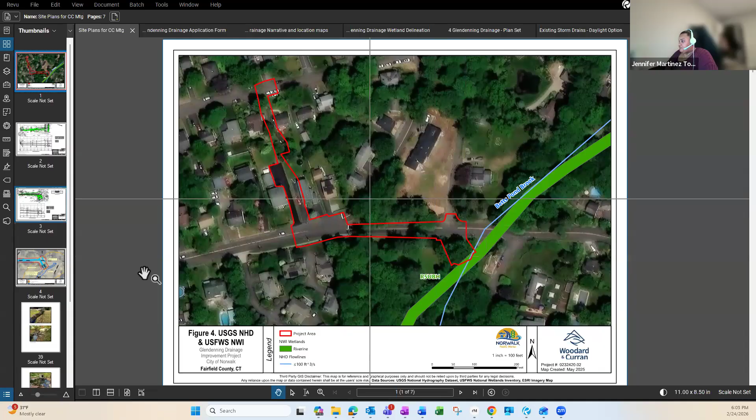So moving on to the next figure. Generally, there's an existing 36-inch reinforced concrete pipe that goes from Glendenning to Cannon Street that we will be replacing with a 48-inch reinforced concrete pipe. At the connection in Cannon Street downstream, that changes to a 6x6 reinforced concrete box culvert. The existing infrastructure in Cannon Street to the outfall is a 36-inch RCP. What's an RCP? Reinforced concrete pipe. So that continues down Cannon Street before it turns to outfall into the Betts Pond Brook. Now I'll hand over the mic to Reid so he can walk us through the outfall improvements and the impacts to the upland area.

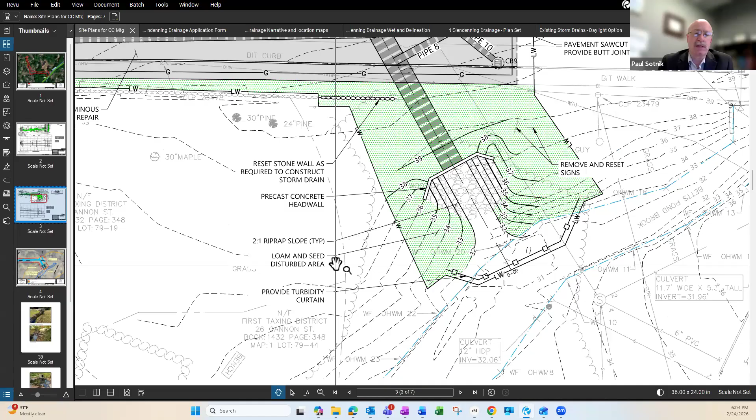And I can give you guys a rough idea of where we are. It's at the intersection of Lane Road and Sawmill, just below the intersection. So this is Lane and this is Sawmill here. This project is being done at the request of property owners. We've had chronic flooding up there for years, and 18 Glendenning and 16 actually get water in their houses. Reid, can you take us through the outfall and the impacts?

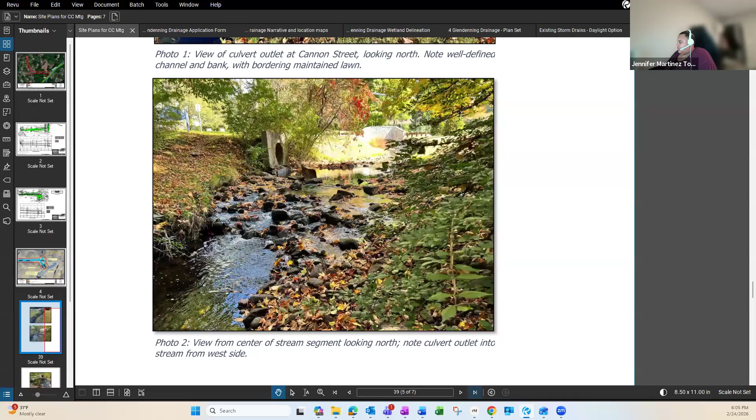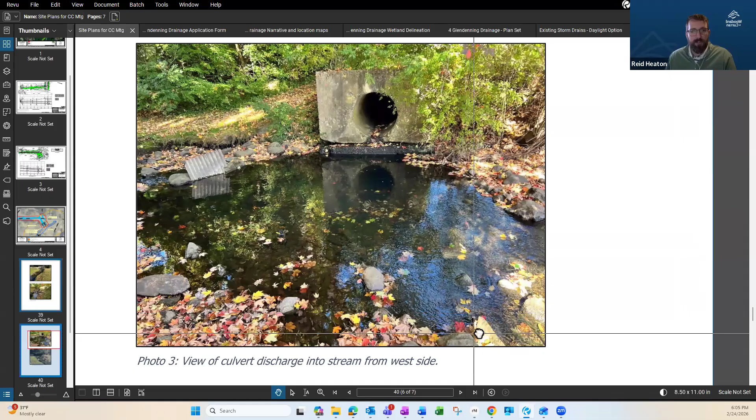Sure. Maybe it makes sense just to look real quick at a picture of the existing outfall. This one is better. So the existing outfall exits to Betts Pond Brook. It is proposed to be removed, which is the work in waters that's going to be required for this project, and then a 6x6 box culvert with prefab wing walls will be installed set back from the ordinary high water mark. So if you want to pull up the proposed plans, Jen.

Yeah, site plan, this one? Yeah, maybe just go straight to the plans. So the work in waters is there at the existing outfall. You see where the turbidity curtain is placed at the brook. And then there's the proposed outfall with some riprap for scour protection.

So this is set back from the ordinary high water mark, one, to prevent placing any riprap or scour protection in the stream, and two, to allow for the additional flow from the larger pipe. So this area would be restored with riprap at the mouth of the culvert, seeding around the area, and then at the end of that riprap, some native material that would be comparable to what's in the stream bed, because we don't anticipate vegetation growing there in the water path. And that is the overall work in waters.

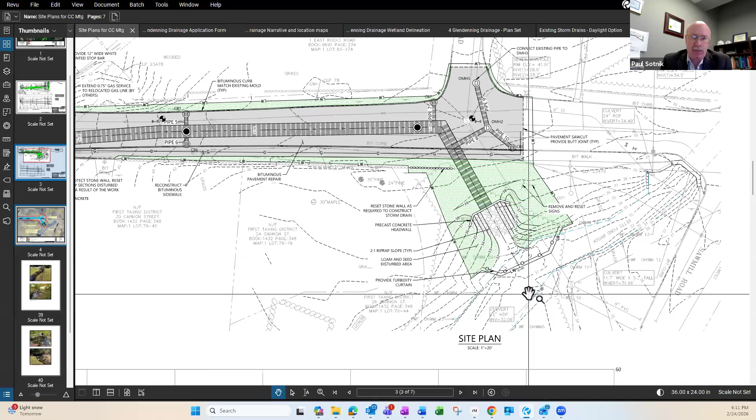So we have a model that we've been coordinating with the city on for a few years now, where we use it to analyze any new drainage improvements in the city and how that would impact the system overall. And Woodard and Curran has a dynamic model that they run that shows in different colors when the flooding starts in existing conditions, and then what it'll look like after, so that it determines it's not going to end up causing additional problems. And one of the key words Jen mentioned, this will mitigate but not totally eliminate flooding. It's to try and mitigate it as much as we can.

Got it. And now, is that something, Alexis, that we should have on file as part of this application? You're muted. Sorry. It's certainly something that you can request to be added to the file. Absolutely. A drainage report would provide you at least some idea of the size of the watershed that this drainage system captures, and then its relative placement within the larger watershed.

Yep. Yeah, if you guys don't mind, it's not that we don't trust you. It's just that it would help us have a complete application. Okay, so a drainage report that basically shows the pre and the post, essentially. Yeah, okay. The pre and the post summary. Oh, sorry. Yeah, I was gonna say pre and post, and so not just obviously Public Works focuses

on alleviating the flooding conditions in the locations that are contributing water to the pipe, and I'd say the wetland agency is obviously interested in helping that situation, but at the same time would like more information about the analyses that were run for quantifying the additional input that's going into Betts Pond Brook. And we'll make sure that we can get that from Woodard and Curran and provide it to you.

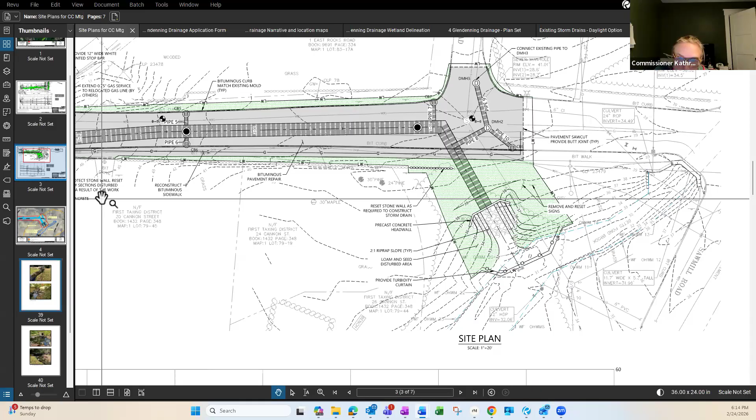Hi, I just had a question because I see it says wooded, but it doesn't have any trees specified in there. But I see that there's some pine trees and a maple tree. Are there trees in there that aren't demarcated that need to come down to facilitate this? I was gonna ask the same question. Good call.

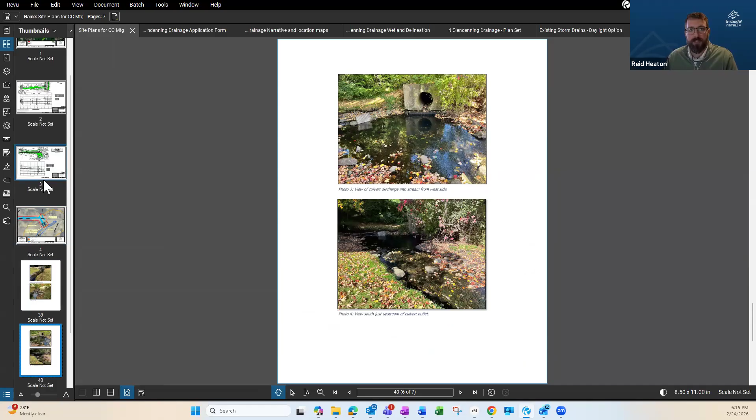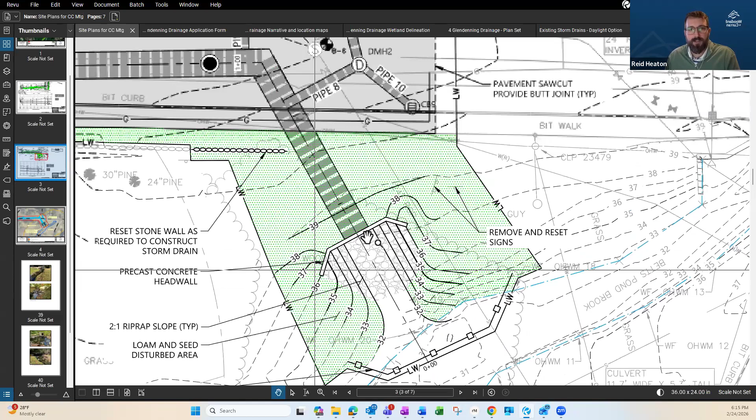Yes, there's some shrubs at the top of the existing culvert, and then to the west, there's some wooded area. You can sort of see it in those pictures that Jen has. But from talking with the team, there's what they see as two mature trees that might need to be taken down to perform the excavation of the existing pipe. And those are kind of west of the existing pipe alignment. And the team has been looking at avoiding them. But if you move the alignment to the east, there's an existing sewer line. So there's no moving that way.

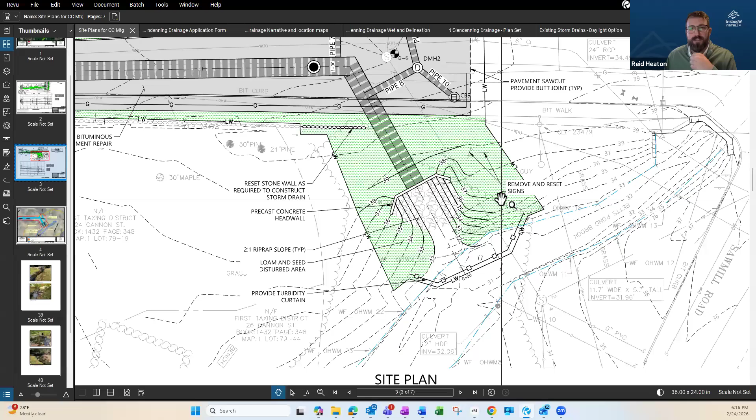And then to the west, I believe there's some overhead utilities that they were trying to avoid. And there's more woods to the west. Yeah, go ahead. As you go further to the west, it gets more and more wooded with more trees. So I guess my question would be, the drawings don't show the trees that are coming down right now? Yeah, we were looking at a sketch from someone in the field of the two mature trees, but we don't have them symbolized here.

Okay, so I guess that I would request that first. It's always good to know, like Catherine was alluding to, what's going to be destroyed as we do this work. And then in a follow-up to that, I would ask, how can we maybe redo or replant in a way that can replace what we took down?

Commissioner Clocky, that's a perfect lead in. I'm working with Sarah Cruz in the engineering division. With the new Chapter 112 from a couple years ago for trees, anybody that does work is required to get a permit. So we are actually issuing permits for city projects too. So we'll be issuing a tree removal.

If it meets the criteria and it's on First Taxing District property, they'd be posted and go through the proper posting process. And then a permit would be issued. But in order to secure the permit, the contractor that actually puts the chainsaw on the trees has to be a licensed arborist, have the proper insurance and bond in order to get the permit.

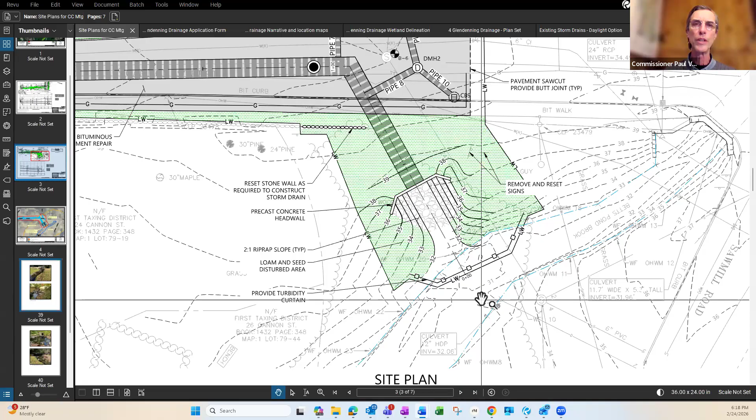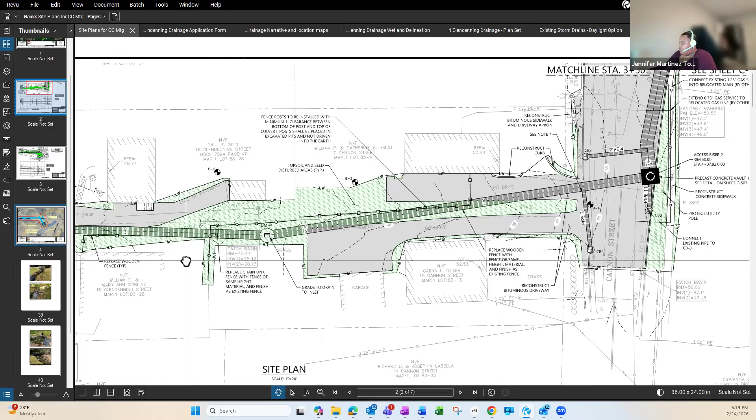Oh, I'm sorry, Mr. Vinette. Yes, being that it's stormwater coming off the streets and being put into the brook, is there any filtration system in there before the water exits? The riprap is intended to dissipate energy, and there's going to be some filtration with that, but we don't currently have an established filtration system upstream of the outfall. No. Mhm. Yeah, I guess that's a good question.

What can we expect? Well, go ahead. Oh, you want to? Well, one of the issues with this is that we have a full size 6x6 box culvert. So to be able to get an online system, it would be a little more difficult because you'd have to basically take the system offline, run it through, and then back in. But then you get capacity issues with those systems also.

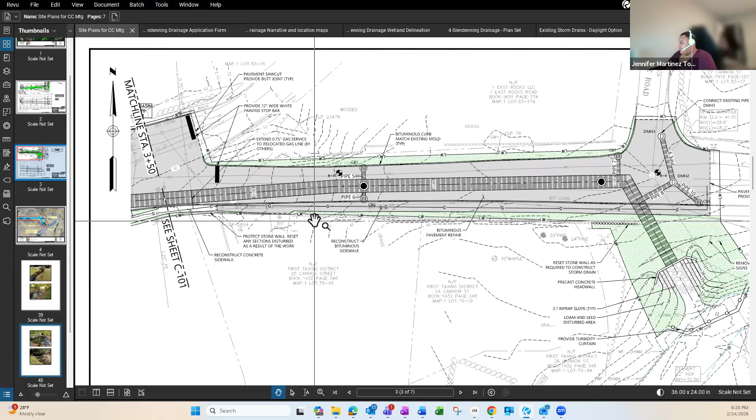And I'd also like to point out, as you see, in terms of collecting the street water, there are catch basins attached to the system, as you can see right there in the picture. And all those catch basins will have sump pits in them. The purpose of sump pits is to collect any debris that could settle through there. That's a part of our regular system and a common practice within any type of drainage construction.

And Jim, can you just explain who you are real quick? Oh, I'm sorry. I'm Jim Meehan. I'm the principal engineer for the Department of Public Works. Should have started off with that. I apologize. No problem.

Thank you. So Paul, and Alexis, maybe I should start there. I want to respect the question and the intent of the question within the framework of what we can expect as an agency and what is typically done in this situation. Yeah, so typically you have not seen water quality improvements proposed where there's an existing stormwater system that's being upgraded. Not always, but it certainly does add a significant cost. And I would think that is probably the main driver.

As Mr. Meehan mentioned, the water gets into the system via catch basins. Those will have deep sumps, which will collect sediment. I don't know if they have all the bells and whistles for trapping of floating debris, but otherwise you get into an initial cost and then a maintenance cost. Again, I'm not Public Works, but Jim might be able to better speak to the limited amount of budget that is available for maintaining the system just for its water quantity needs.

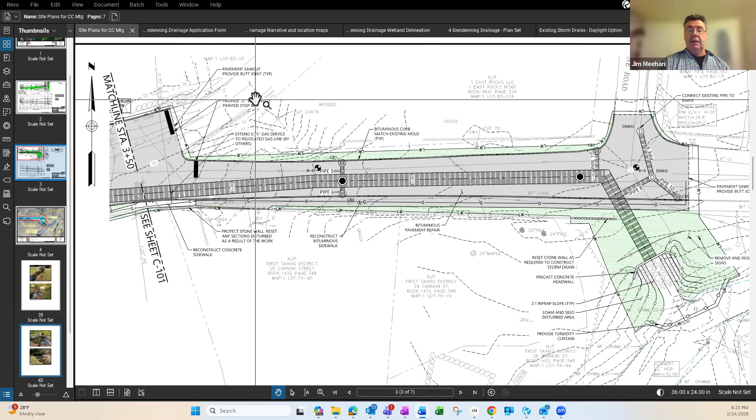The box culvert that we're proposing over here is basically updating an existing system. So it's not really introducing any new debris into there other than the catch basins themselves, which to our particular point, when the rainwater goes into the catch basins, the sediment will be heavy enough, will sink into the sump pits. And then periodically our maintenance crews go out there and they will just maintain them. And they'll vacuum it out. They'll do everything and clean it out periodically.

If we have determined that the particular situation, most of them tend to be kind of standard. If for any particular reason there's concern that, hey, listen, this particular area could have more debris, let's say we have done those in the past, we would tend to treat that, as long as it's feasible, to increase the size of the sediment basins, the sumps that are in the basins themselves. With that, I'm not sure if this particular region calls for that, but that's certainly something we could look into, provided that there's depth to put in more depth of the sump itself. And if we could do that, make sure that it collects any additional debris.

Okay, I think there's actually a little more depth to Paul's question, but thank you for that response. We'll keep going and maybe we'll circle back or maybe these guys will address it. But let's see. Elise, you had your hand up, then you dropped it, and I think go ahead. I think that's right. Miss Heath raised her hand first. Oh, okay. Did Catherine get you? Okay, go ahead, Catherine.

I guess I just have a question on the runoff, because is most of the runoff that's getting pulled in here coming from the road or is it from other things? Because normally, I just wonder if there's a different burden that residential and commercial runoff systems have to have over and above the city. Just trying to understand that. And then there obviously are issues of water quality going into the brook with a lot more road runoff that is a little bit concerning.

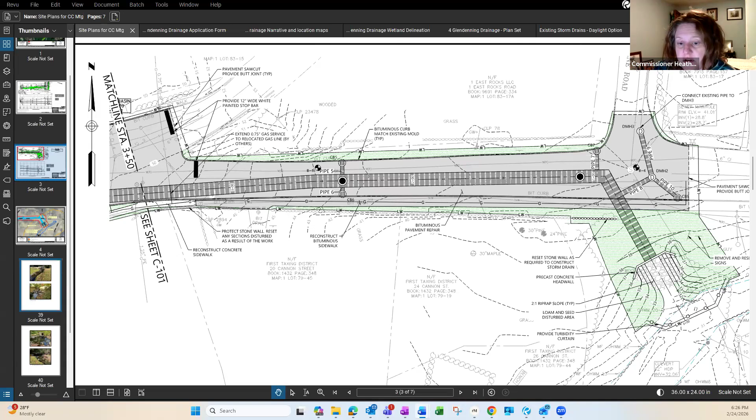Where the pipe exits right now. Steve, you spoke to this before, but about the impact downstream from there, I believe it's a pretty low-lying area down there with more water being pumped through, and where it comes out right now the banks are really, really eroded, and the tree roots are bare and everything around it. I live across the street, so I'm familiar with it. I just would like to see something set up, if possible, to restore it a bit with plantings. I think it'll go a long way towards hopefully mitigating flooding. Right now, it pretty much dips down like this and everything's eroded out.

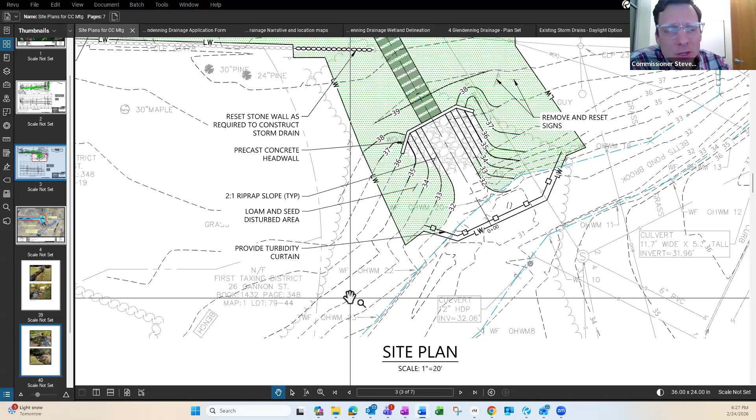Well, I'm confused though. So we're not changing the profile of Betts Pond Brook. But is that what you're suggesting? Jennifer, could you flip down a couple pages to the pictures? Because I don't live across the street, so I'm not familiar. Yeah, the work on the banks will be limited to just that area at the existing outfall. The park is to your left here, is that right? Well, wait, no. Cannon Street is to the left, north.

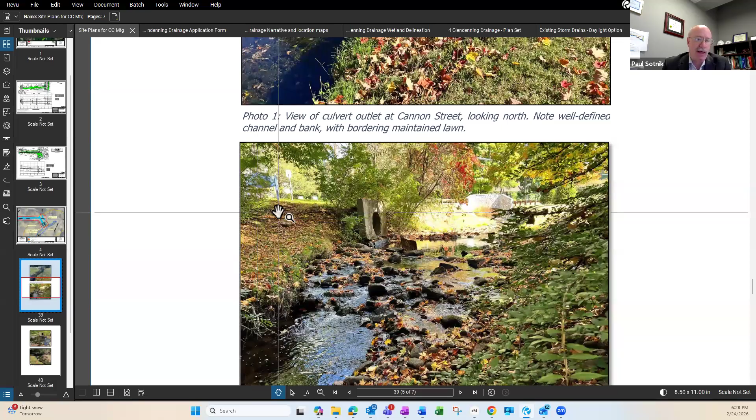Do you live along Sawmill? Sorry? Do you live along Sawmill? No, I live across Dry Hill, so you're coming right across Sawmill from where the entrance of the pipe is. So right, Cannon is to the north and the park is to the north. In that area there, that's all the First District Park. Exactly. That's to the left, right, Paul? To the left, that's correct. Okay, so Heather, what do you, yeah.

No, my point is, is there going to be increased output from the water here from the new, I mean, I would assume considering... Yeah. I mean, the whole point is to increase the size of the pipe so you get more water through it. Right. And my concern is that when the water gets here, it's a fairly flat or eroded out banks over here. I see, yes.

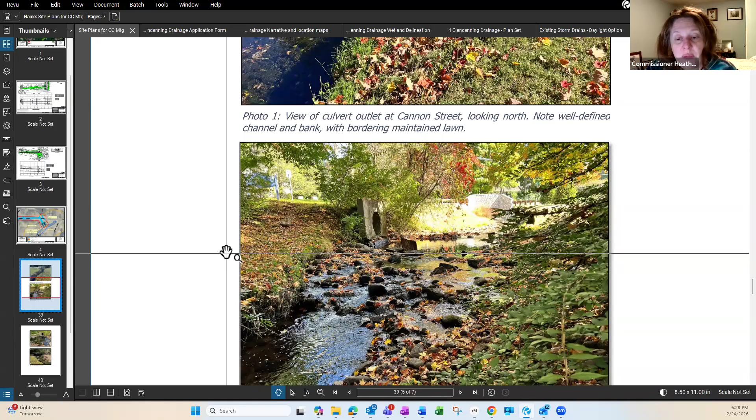So Jennifer alluded to it where they're pushing the head wall back. What do you call that part? The head wall and wing walls. Pushing it back into the slope and providing riprap, kind of a runway, I'm probably putting words in these engineers' mouths, so forgive me, but providing a runway to slow down the water before it enters into the brook. Right. Okay. And I would assume that's where the trees are coming down as well, potentially. And if so, is there a planting plan?

I just wanted to echo what Elise was saying, if there's anything that we can do as far as replanting or planting better, improving. Yeah, Paul had said that they will be doing a tree replacement plan, but we said it'd be nice to be in this application, so he's going to do that. Okay. Paul, what I'm hearing is maybe a step above your replacement plan. It's a request to look at a way to enhance the area even more to make it more resilient than it is now. Yes, that was my question. Sorry if I missed that. I've been trying to turn this map around on my screen to figure out where I am for like 10 minutes. It's okay.

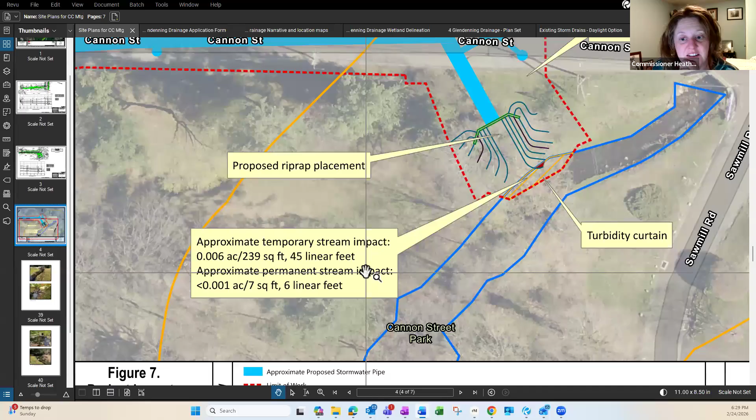Matter of fact, one of the trees, see where the turbidity curtain label is right there? Yeah. As part of the box culvert, when we were doing the repair of the bridge, you'd asked us to put the tree in right above where it says curtain. That's the tree that went in as part of that project. Okay. Yeah, we can definitely put together something. We can work with Alexis, between Sarah Cruz and Alexis and I, to come up with a planting plan that we would recommend and then provide it to you.

Great, thanks. I heard two questions, and I think you've already said that you'll get that to the commission before their next meeting. One has to do with the construction phase and replacement of vegetation lost and mitigation of the grading associated with the new head wall. And the other, I presume, will be taken care of with the drainage report. I just wanted to confirm there's an existing stormwater drainage system here now.

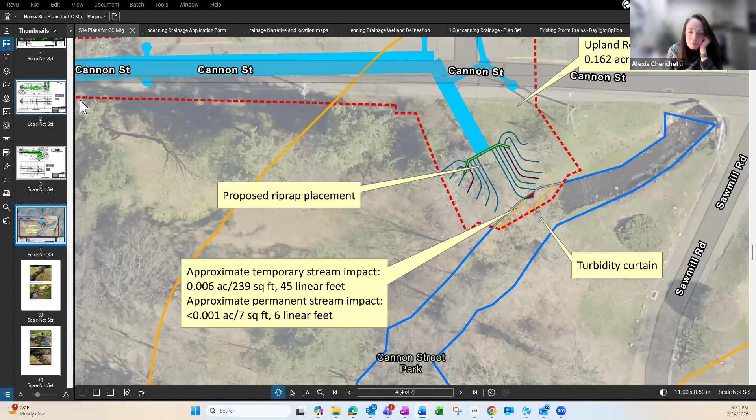Are you proposing any additional expansion of its area of contribution, additional catch basins, or is it just the pipe size getting larger to increase its capacity? The pipe size is getting larger. So there's no new grate inlets in the street, for example, or in these backyards. So the area that's draining into it isn't increasing.

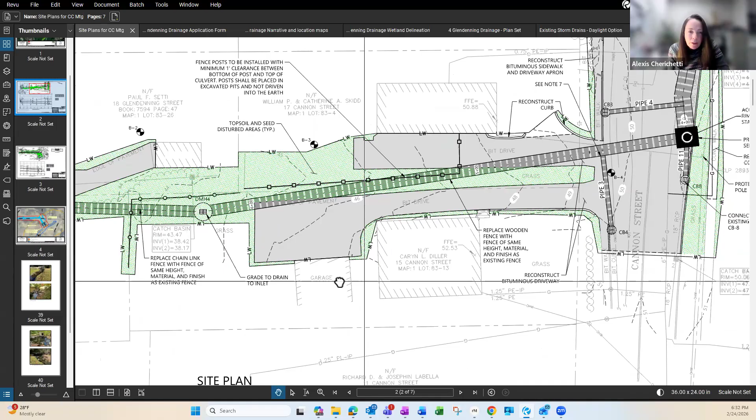It's just that the pipes are currently too small to carry that water during certain storm events sufficiently, so residences are getting flooded. So you're not going to be increasing the area of capture that contributes to this system, but the size of the pipe will be increasing. Is that an accurate statement? Believe so, right, Jen? Yes.

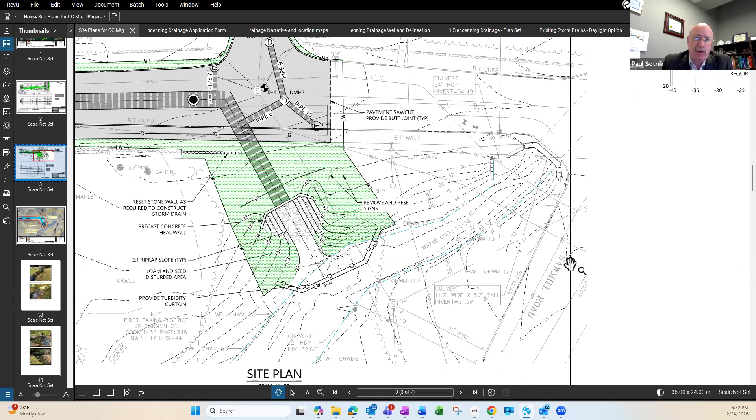Okay. And Commissioner Clocky, you described it exactly right, providing a little bit of a runway before it gets into the brook so that the velocity of the water can be dissipated, and then it goes in and it isn't going in nearly as fast and it won't erode like what everybody is expressing that they're concerned about.

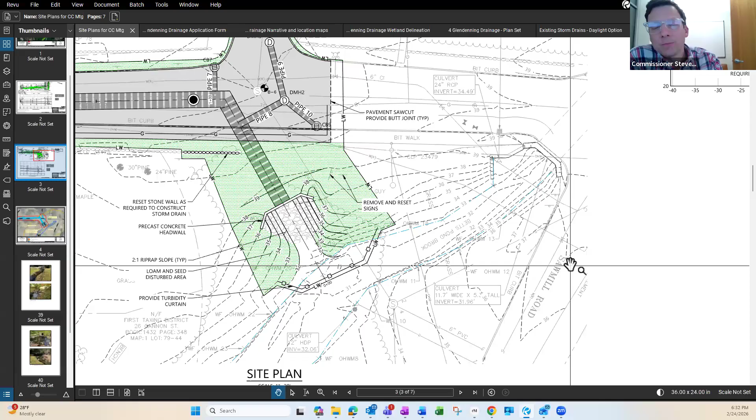Yep. Okay, so great, we're tying up loose ends here. Now to tie up the one that Paul started. We received comments lately about how we need to treat all applicants equally and fairly. A lot of times in a development, for example, we will expect a parking area to have a drainage system that includes a sort of filter system to catch not only sediment and debris, but runoff, oil dripping out of cars, things like that.

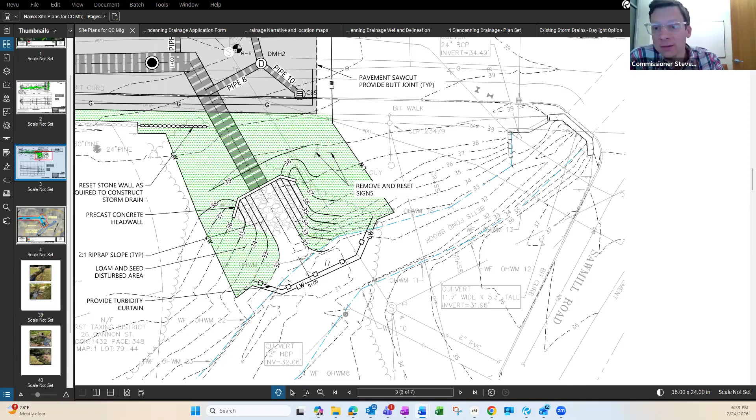So I understand that to do that across the entire city would be bananas and incredibly cost prohibitive. I guess I just want to verbalize that it's something to consider. I'm not sure it's something that we can enforce as in adding more protections for the water quality. But I'm happy to hear other people's input. And Mr. Vinay, please. So maybe either Paul or Jim, you can explain the city's MS4 program and how it works.

Yes. So all municipalities, not just in the state of Connecticut but really all the states, have what's called an MS4 program. It's a quality control for stormwater output. It's required at both the state and federal level. EPA requires this. So we have a system where we're basically inspecting outfalls. It's testing on a rotational basis over a 5-year period.

Norwalk is actually considered to be one of the leading municipalities in the state of Connecticut to implement this process. We currently have an entire department over at WPCA where one of our engineers is in charge of this. They monitor any type of pollutants that are taken out of outfalls. It's a monumental task in the city of Norwalk, as we have so many outfalls. I believe the number, and I could be wrong, is approximately around 15,000. So it's done on a 5-year rotational period, inspected, tested.

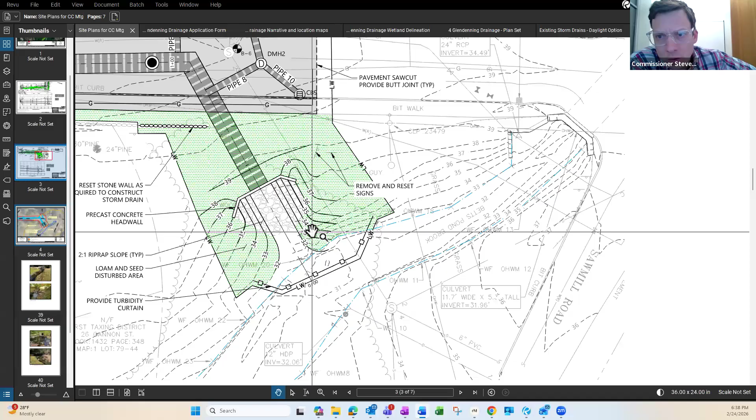We're trying to protect the water, but also all the animals and wildlife and the entire ecosystem downstream of this area. So what would that look like, Jim or Jennifer or Paul or actually Alexis, go ahead, jump in, please. You're muted.

So I know that the chief of operations isn't here, and I can hear her in my head. So I'm just going to say some things that I suspect she would say if she were here. And I'll start with, obviously as your wetland agent, I agree that water quality improvements are essential. But this is the Vanessa part. I wanted Jim to talk about the MS4 program because the city does invest a huge amount of resources into that program, working on its drainage system.

And most of what contributes to the drainage system is non-point source pollution, which we've all heard about. Those are kind of like the general areas where there's runoff, right? But once the city has a pipe system, the EPA considers it a pipe discharge. And being a pipe discharge, the city is then in charge of doing what it can to improve the water quality coming from those pipes.

But the roadway is a portion of what contributes to those pipes. I'm hoping that the drainage report will show that it's actually a fairly large kind of a watershed, and it includes all the residences or schools or whatever that's within the drainage area, the small watershed for each drainage area.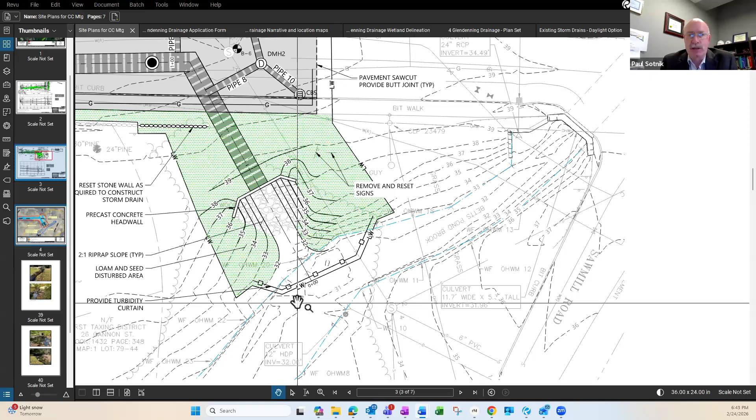And to add to what Alexis is just saying too, on the properties when they're being developed, the layout of the parcel is done with those pieces of equipment or treatment systems on the property. In the road here, and Jen can kind of scroll back over to the left a little bit, we're going to have to relocate a gas line. We barely missed the water lines and the sewer lines. We are lucky that we don't have to do anything with them.

So there's not a lot of real estate without having to go get an easement to put it on, say, the First District property, because you'd have to come out at the end of the pipe and put it through a system that's big enough to handle the flow in the 25-year storm and then take it back into the culvert so you don't have two outfalls instead of one. So basically, there's not a lot of real estate to put some kind of a treatment system either. And some of them can get very large.

Okay. Thanks, Paul. So to Alexis's point, it's apples and oranges a little bit.

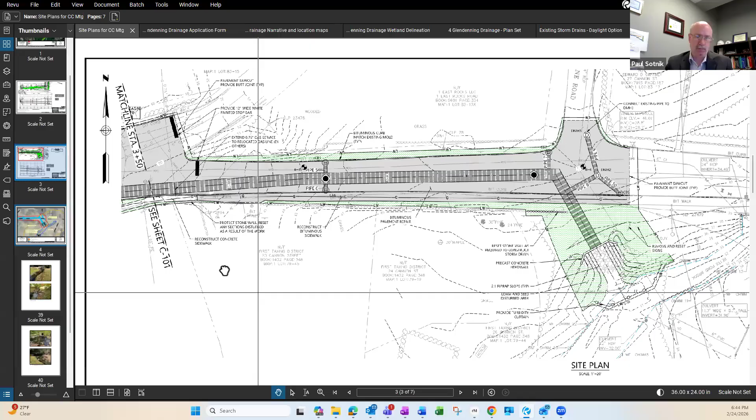Okay, other commissioners, additional questions? All right, so it goes into it. Sorry, just the Betts Pond Brook goes into another pipe before entering the Norwalk River also, doesn't it? Downstream. Yeah. Yep. It daylights and it's piped, and it's daylighted and piped multiple times before entering into the Norwalk Harbor. That's what I thought. Okay, thanks. Sure. Yep.

Okay. All right, we'll thank the applicant for their time, and I suppose you'll be in communication with Alexis over the next couple of weeks until our next meeting, which is March 10th. And Alexis, assuming that you think that the updated plan, especially with regard to trees and landscaping, aligns with the feedback commissioners have provided, hopefully you can have a draft memorandum or resolution, and hopefully we can vote on it then. Does anybody have any other questions? Otherwise, we'll move on.

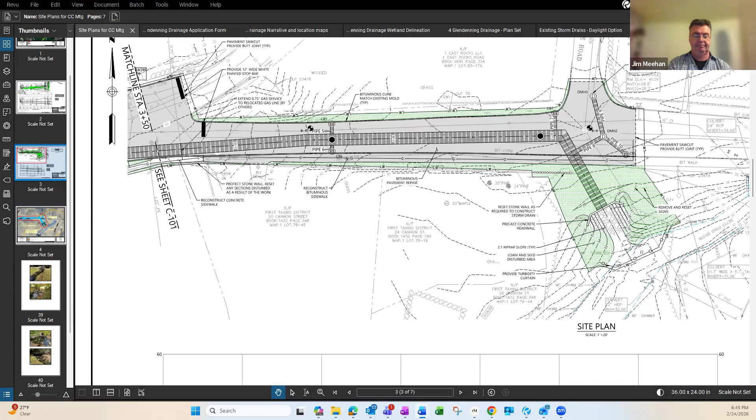All right, moving on to S26-661, 5 Witch Lane. So this is a pending application for a 2-lot subdivision on Witch Lane. I think the applicant's representative is here. Attorney Suchy, if you want to just give the commission a brief update, and then we can go over the logistics maybe. Sure. Thank you, Ms. Carachetti and Mr. Chairman, members of the commission, Liz Suchy of Carmody Torrance Sandak and Hennessy, and I represent Kristen and John Maloney, owners of 5 Witch Lane.

We did meet with Alexis and representatives of DPW and Planning and Zoning last week to discuss the 2-lot subdivision. We're working on a revised plan that I think we shared last week that showed a dwelling on the eastern side of the brook with no crossing. And we're now working on pulling that structure as far away from the brook and giving a buffer between the edge of the dwelling and that brook. We have a couple of other issues we have to work out with Planning and Zoning, and it relates to ownership of the adjoining right-of-way, things of that nature.

And I think that if we adjust the plan and propose a dwelling on the eastern side of the brook with a significant distance from it, it will also resolve issues that Public Works has raised. We're not there yet. We're working on it. So I just wanted you to be aware that that's what the status was. Those were the discussions we held last week, so that you are not wondering if this is just languishing without any activity. That's all I have to share tonight.